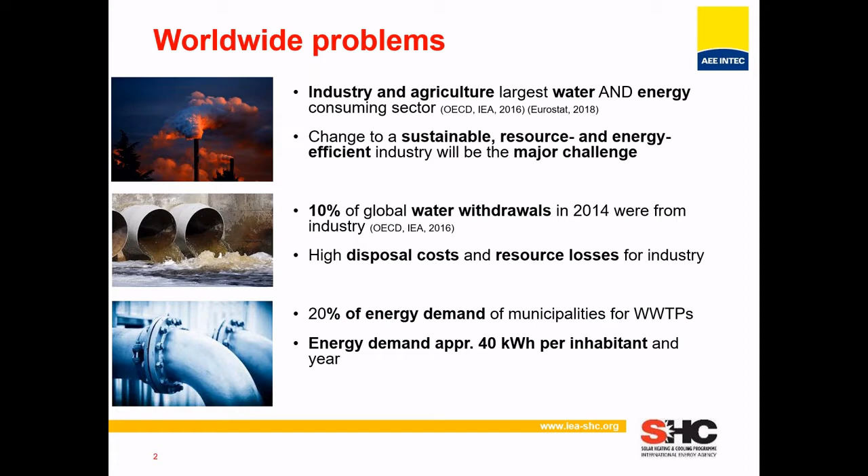What are now the main approaches, what we are dealing with within our network, within our Task 62? On the one hand, we see solar energy as a reliable source to reduce this fossil CO2 emissions in these different applications. We want also to create tools, a good ground to boost these markets on solar thermal industry, but also on water purification industry. And we have here two different approaches, two ways where we want to use the energy, the source sun, in general.

On the one hand, to use it on the solar thermal area, and to use this thermal energy to run different technologies - water purification technologies, water separation technologies, like membrane distillation, like evaporation, vacuum evaporation, etc. And on the other hand, we also want to use the solar photons to deal with or handle this wastewater in this way, applying technologies like photocatalytic water purification, decontamination, or disinfection systems. In my talk now, I'll focus on solar thermal technologies.

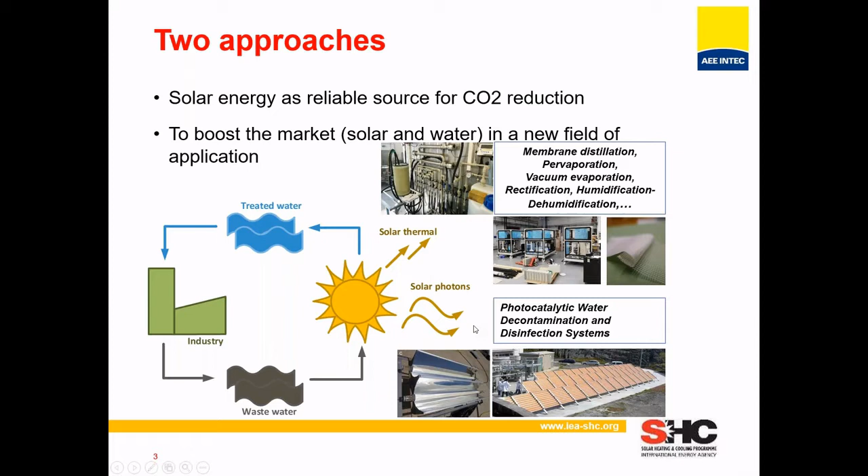What are the targeted results? As I said, the title of the talk is this Nexus energy water industry, and the targeted results are also allocated to three areas. So the energy area, or the solar area - we want to develop new solar collector concepts. We want to have a strong link to solar collector suppliers, developers, so they get new market ideas, and to identify potential markets for the technology itself.

On the water side, of course, water separation technologies, decontamination and disinfection technologies - to apply and see how these can be linked with solar applications, and of course to recycle valuable resources out of wastewater. And for the industry, we want to identify emerging technologies which are not state-of-the-art at the moment, but have a big potential in the future. We want to create energy and CO2 savings, of course. A guideline for the stakeholders will be developed, and we want to identify different integration concepts.

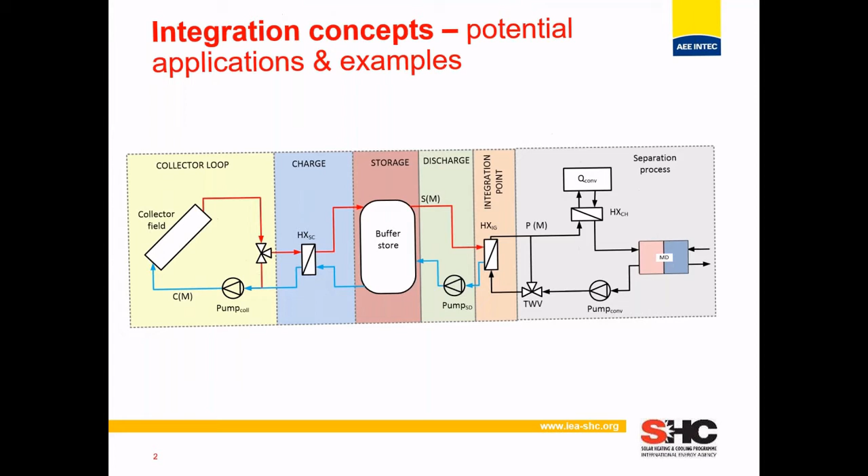Speaking about integration concepts, this is a very general structure of such a possibility, how to integrate or combine water separation technologies and solar thermal. On the one hand, you see here the solar thermal collector fields. Then we have a charge system, heat exchanger, a storage system, a discharge system, integration point, and then on the right side, the separation or purification technology, which gets its energy from the sun, from the solar collectors, but also additionally from other conventional energy sources.

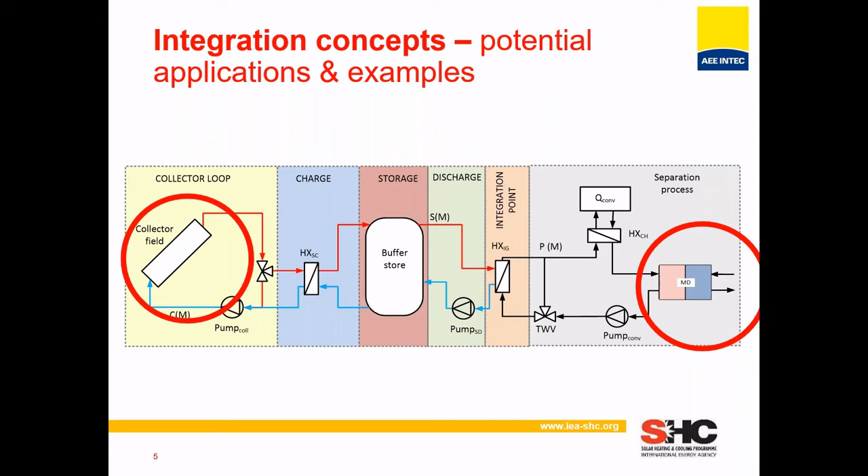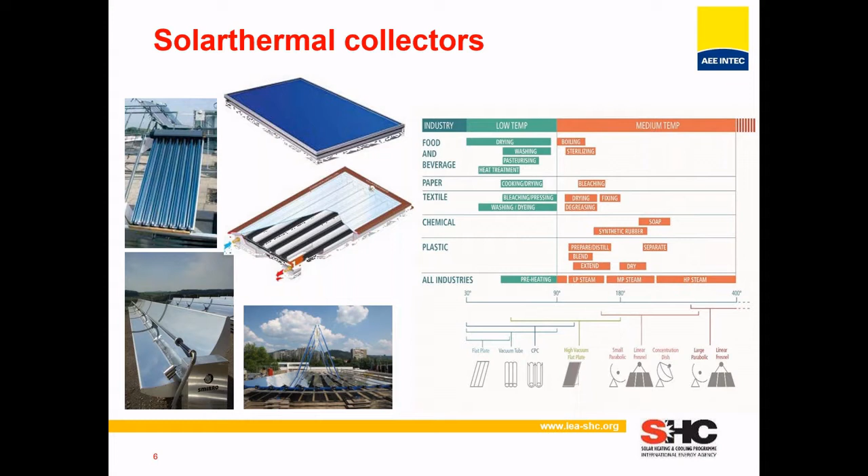But on the industry side, I think this is maybe not so well known. We identify different applications, different possibilities, different industry sectors where, at the first approach, we have the highest potential. Galvanic industry, to recover valuable metals and also to recover acids. We see here a big potential for this Nexus application.

Then textile industry, to treat wastewater, especially wastewater coming from the dyeing processes. The food industry, of course, to treat process streams like waste streams or milk streams, to concentrate these streams and to generate, for example, whey powder or milk powder, or also to concentrate juice, but also to recover volatile aroma compounds in different products.

The bio-based industry, as a biorefinery industry, a future industry sector, but we see here big potential for this combination of different separation technologies to recover ammonia, to use this as a fertilizer, but also maybe to use it as an energy vector. Additionally, to treat biogas sludge, and to recover ammonia, or to reduce other compounds in this sludge system.

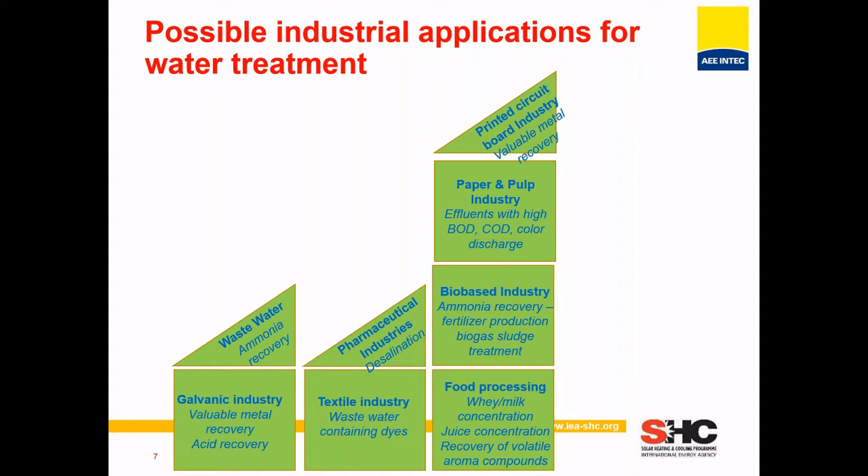Pulp and paper industry. We see here a big potential, especially in the different wastewaters, to decrease the BOD, COD as a combination of different compounds in the wastewater, or also to reduce the color in this discharge system. Wastewater in general, I will give you some examples later on, especially to recover ammonia as a very promising future energy vector, but also as a basis for fertilizers. And also pharmaceutical industry, especially in the desalination to recover salts coming out of this product, and the printed circuit board industry, to recover valuable metals like gold or palladium.

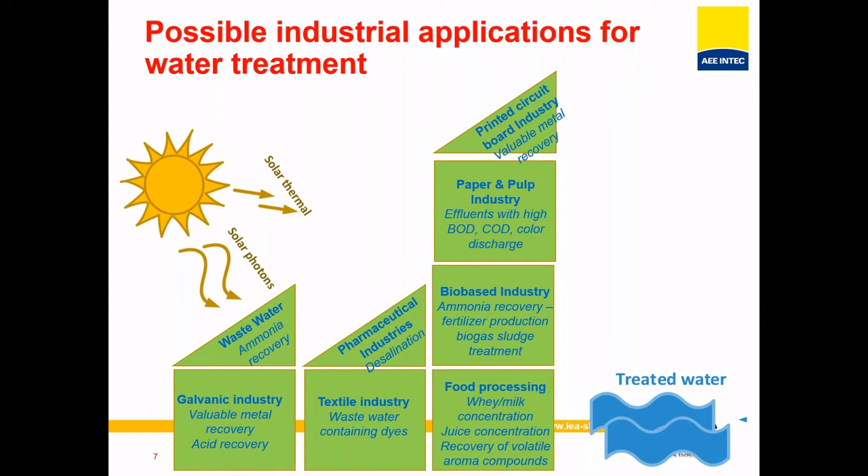These are the different applications where we see a huge potential, and I just want to give you a few brief examples. First example is for the galvanic industry. This is an example from an Austrian galvanic company, and the problem here is that this rinsing bath, or the preservation bath, is full of chemicals, and additional water always gets into this bath, so they have to add chemicals to keep the concentration in this bath.

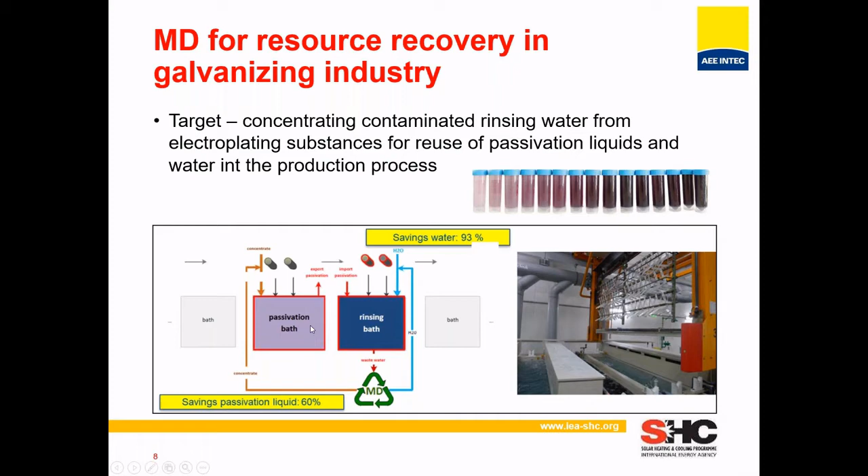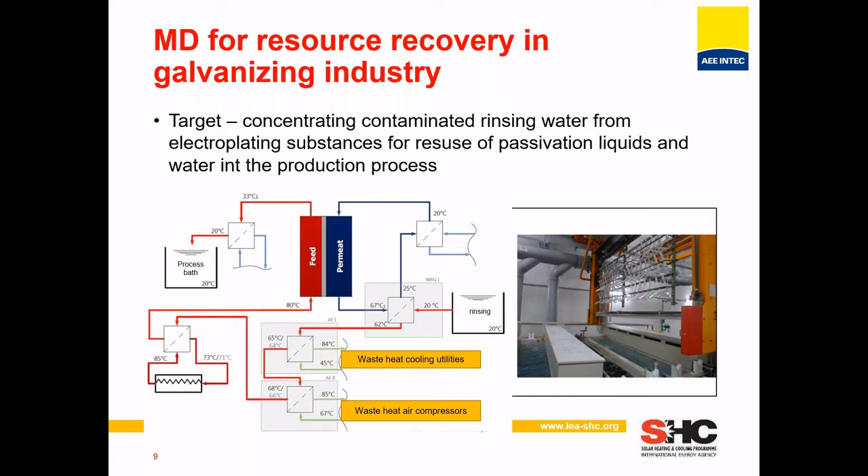We developed a concept, shown here, how to continuously recover these chemical baths, to separate water out of this bath, to generate water on the one side, and to keep the concentration in this bath on a constant level. The idea was then to run this separation technology, which is done by membrane distillation, on the one hand with waste heat, but also with solar applications. The results are impressive: about 60% chemical savings and more than 90% water savings could be reached in this case study.

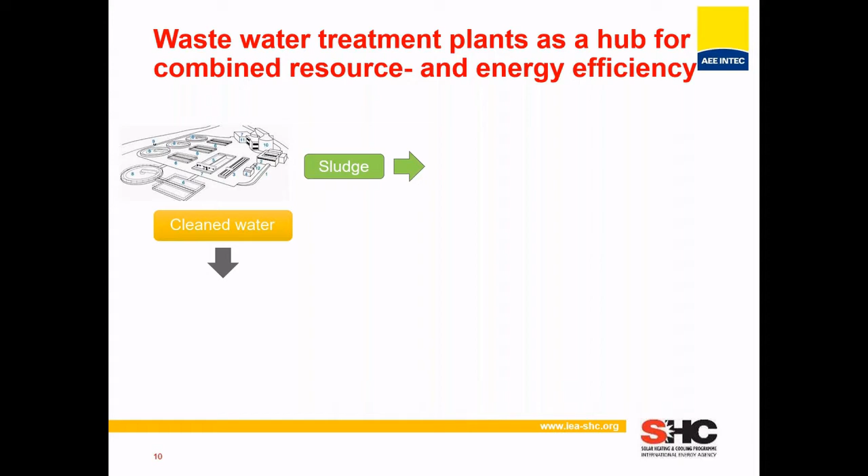The next example: as I told you already, wastewater treatment plants are a huge consumer, but also have this big potential to be one of these future energy distribution points for cities, for municipalities. How could such an integration of a wastewater treatment plant look, to develop a concept where the wastewater treatment plant is not a consumer anymore? Of course, clean water is the most important part, but we also have sludge going out of the wastewater treatment plant.

Now, the clean water going out of the wastewater treatment plant has a certain temperature left, and in combination with a heat pump and this heat exchanger, a huge potential of energy recovery is possible. The sludge is in most cases already treated in a biogas plant, in a digester tower. Here we have the biogas, but this is not used very often, and we have the residues out of this biogas plant. What can we do with the biogas? It can be treated in a CHP plant, a combined heat and power plant. It can go directly into a gas network.

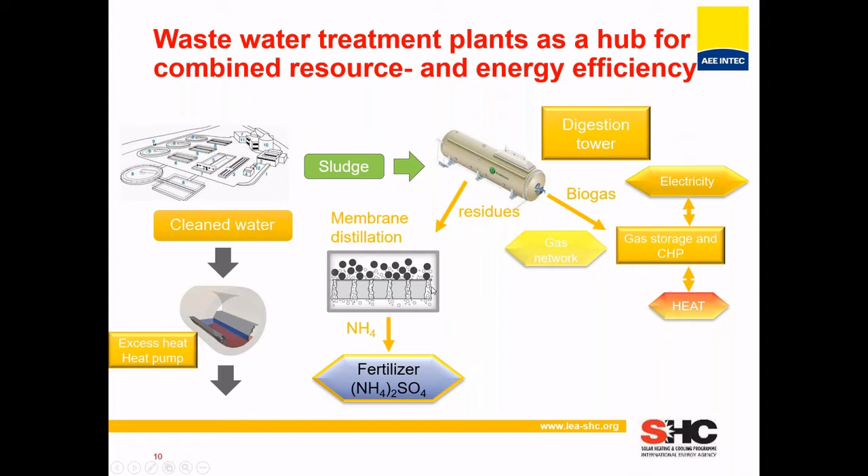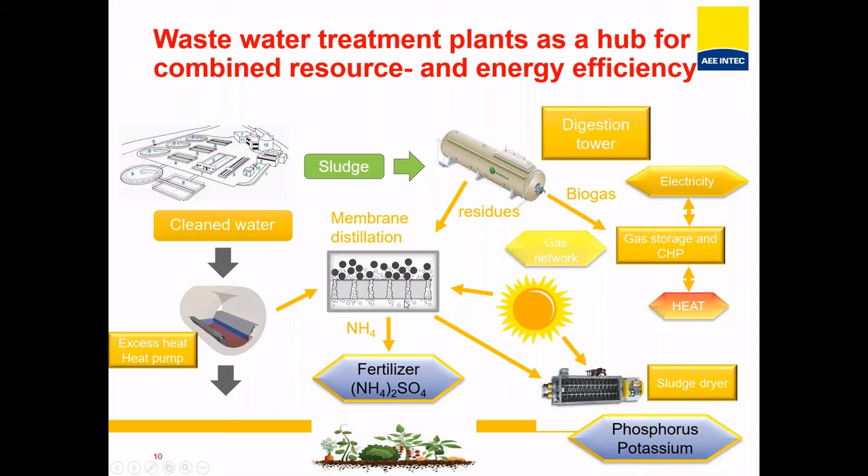And the residues can be treated, as I told you already, for example, with a membrane distillation facility technology to create ammonia, and use this as a fertilizer. The sludge can be dried, and potassium and phosphorus can be recovered in this form. And you can see here, solar applications can be applied in the membrane distillation facility, but also as a solar dryer.

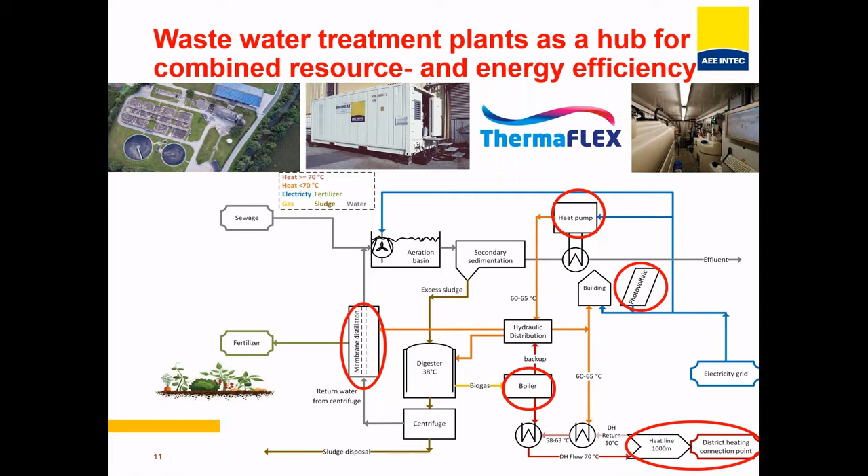It is not only theoretical. We are working here on a pilot plant at the wastewater treatment plant, where, as you can see here, this concept is created with different applications similar to what I showed you before. Here's the heat pump, photovoltaic, membrane distillation, the boiler, and using also the heat for the district heating part.

What is important? What can you reach with such a concept? You can reach up to 20% electrical savings. The yield of biogas can be increased up to 30%, and additionally quite a substantial amount of fertilizer can be produced by separating the ammonia from the sludge. And this combination with a solar thermal sludge dryer, heat pump, CHP, and additionally the ammonia can maybe be converted into energy in a fuel cell.

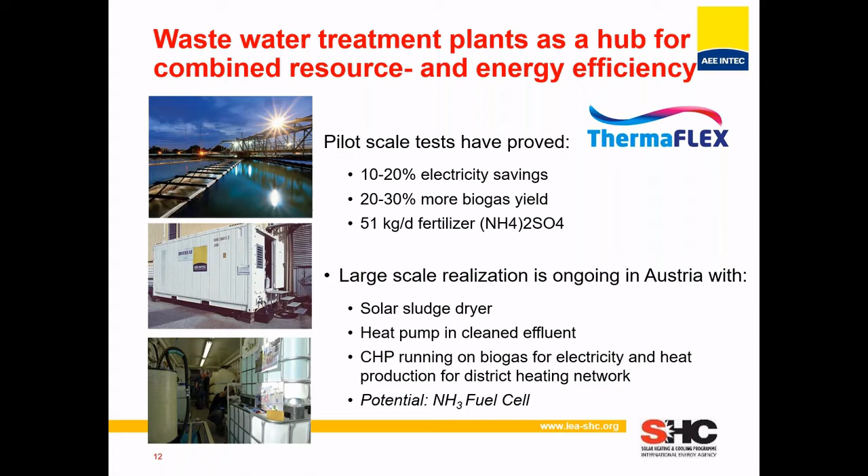So, different possibilities. This pilot plant is at the moment in erection and will be implemented in an Austrian wastewater treatment plant.

Coming also to a wastewater treatment plant with some additional applications. This is the project Greenlysis, which combines separation water technologies to create hydrogen and oxygen out of the wastewater. It's from a European project, but led by a Spanish company and the University of Barcelona.

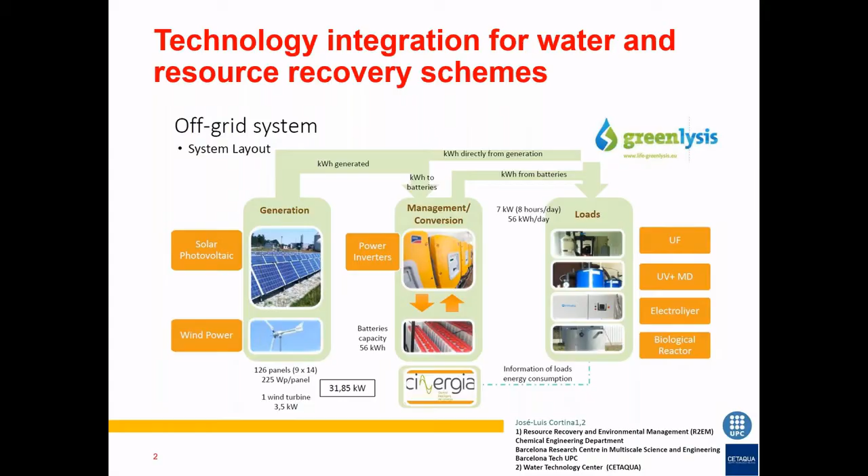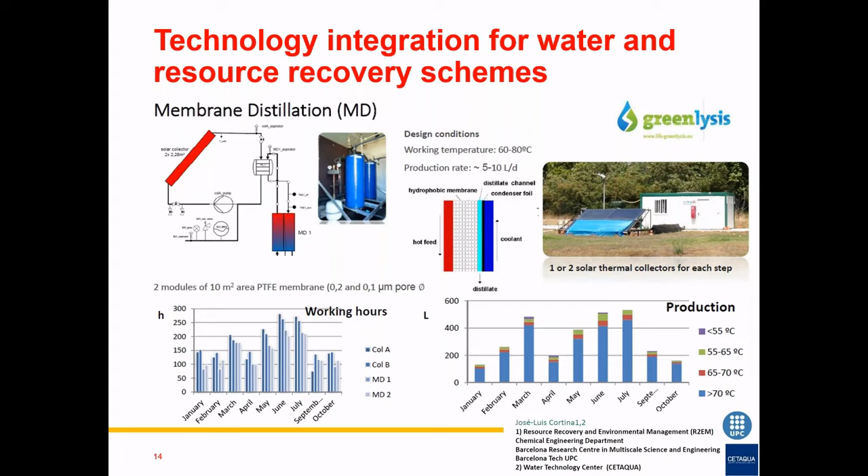And with this combination of wastewater pre-treatment, wastewater purification, with electrolyzers which are implemented, with solar photovoltaics, wind energy, but also solar thermal, which is together with a membrane distillation facility that also treats the effluent water out of the wastewater treatment plant, hydrogen and oxygen should be produced, with the potential to integrate this hydrogen into, for example, a methane network.

Another quite interesting technology or product is a solar panel or solar collector, where you find a combination of the purification of water directly with a membrane distillation facility. So you can see here, dirty water is going directly into this collector. The sun is heating up this wastewater, and with the membrane distillation, pure, cleaned water is separated, and we have a higher concentrated wastewater on one hand, and on the other hand, clean water.

Drinking water. The idea here with this product, which is from SolarDew, is to produce drinking water in areas like developing countries and emergency areas, but also for military applications.

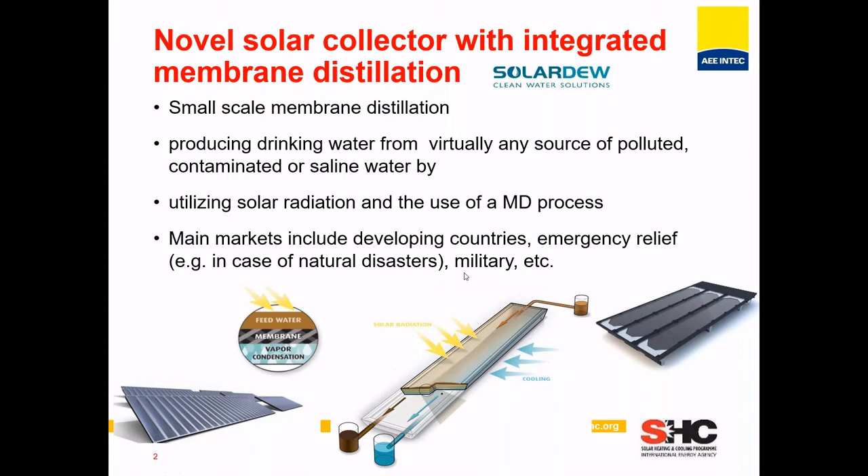And my last example that I wanted to show you is a combination of solar concentrating systems, Fresnel collectors from the company Rioglass, and they are supplying the energy coming from these concentrating systems to a vacuum multi-stage evaporator, which is a pilot plant running in Spain for wastewater from copper mining applications, as you can see here below.

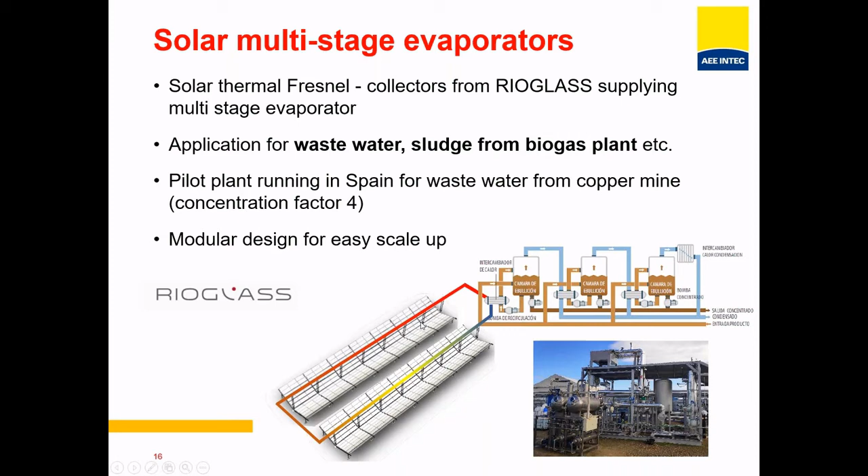And it is interesting especially because here too, similar to SolarDew, it is on a modular design basis, so it is easy to scale up such systems, on the one hand on the solar side, but also on the evaporation side.

Coming to my last slide, what are up to now the most important findings? The nexus of energy, water, and industry is very important. I think I showed you the numbers in the beginning. I think it's obvious. It's a very important future topic and a future strategy to reduce CO2 emissions.

Wastewater treatment plants are promising energy and resource sources. So it's no longer the case that they are just consuming energy. They can produce energy and they can also produce valuable resources like ammonia or potassium. Membrane separation technologies for recovering nutrients and products out of wastewater could be identified and will be under future research, to really select the right technology for the right applications.

New solar thermal collector concepts will be needed, but some of them are already on the market, like I showed you with SolarDew. Then also, of course, decision-making guidelines, tools, etc., will be important in the future to disseminate these activities and to reach further industries and further applications.

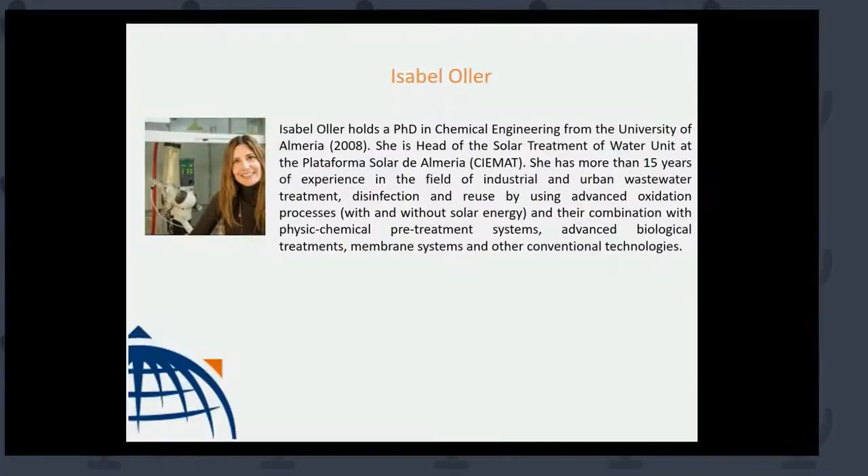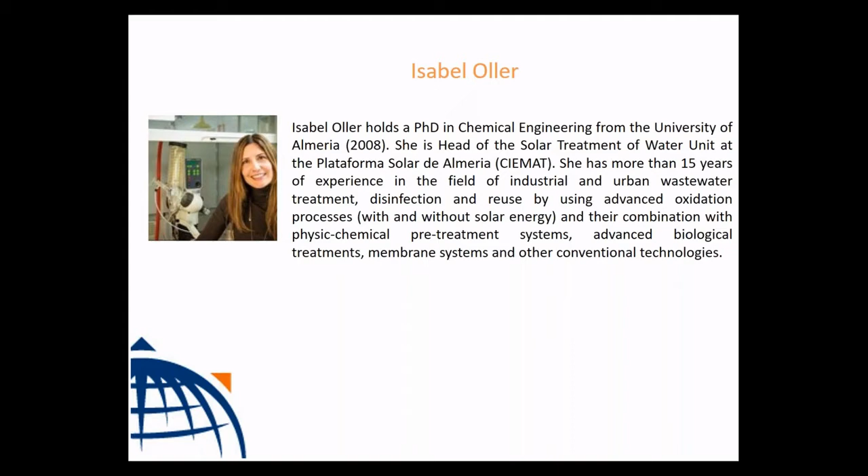And I will now welcome Isabel Oller, our second speaker. She is head of the Solar Treatment of Water Unit at the Plataforma Solar de Almería in Spain. She has more than 15 years of experience in the field of industrial and urban wastewater treatment, either like advanced oxidation processes or combining them with physicochemical treatment or membrane systems. And she holds a PhD in chemical engineering. Her topic today is Towards Industrial Water Footprint Reduction via Solar Decontamination and Disinfection Advanced Processes. So Isabel, the floor is yours.

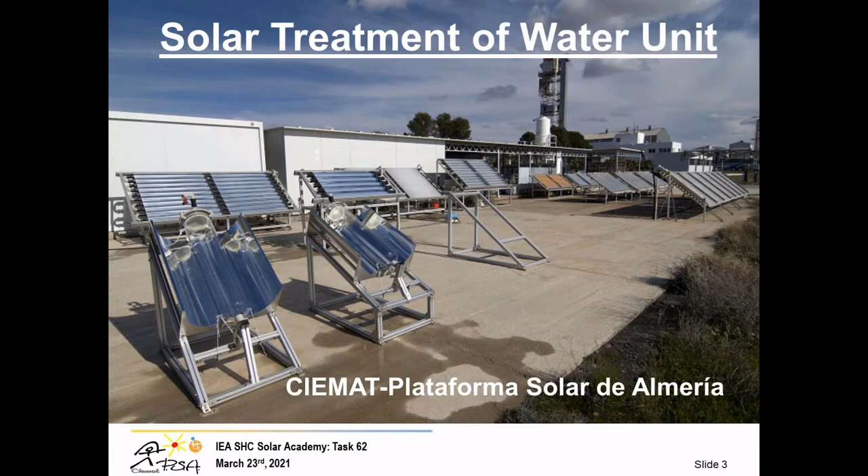We are located in the southeast of Spain, in the desert of Tabernas, around 100 hectares. And this is only a picture of one of our facilities in the solar treatment of water research unit. I'm the head of this unit now, and these are some of the lines that I would like to share with you that we are focused on in research and development. As you can imagine, like the rest of the PSA, we are focused on being in the middle between lab scale experiments and demo site experiments and going to market technology.

We try to focus on solar photocatalytic and photochemical processes as tertiary treatment for removal of pathogens and pollutants in urban wastewater. But we have also a strong research line focused on the integration of advanced oxidation processes and other conventional or advanced technologies such as membranes, ozonation, for hazardous pollutants and pathogens removal from industrial wastewater, but trying to be always focused on reducing operating costs and, of course, improving the water treatment efficiency.

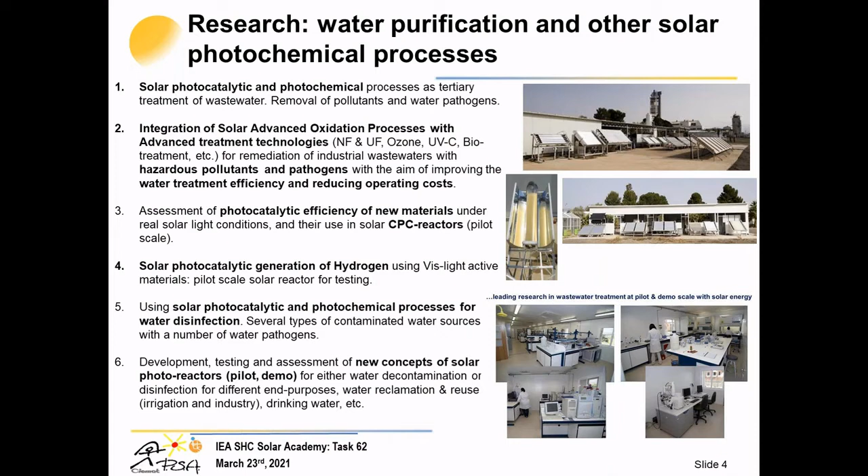We are also focused a lot on trying to develop, design, and test new concepts of solar photoreactors at pilot or demo scale, for water decontamination and disinfection and mainly for reuse purposes. As you may know, we are living in the southeast of Spain, so we have a lot of water scarcity problems.

So as all of you know, the water energy nexus is quite an important issue nowadays. Of course, we use water for energy production. This is something that not all people know, but we also need energy for water. We need water for producing electricity, even for some of the renewable energy sources.

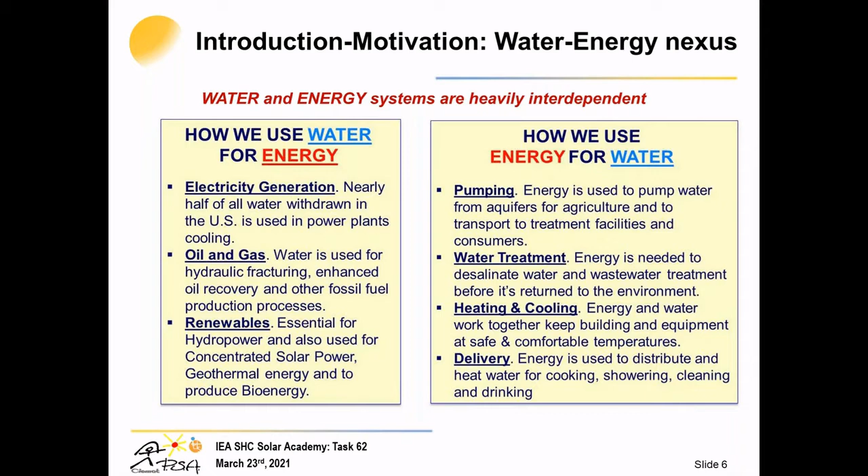But we need energy not only for pumping water, heating and cooling systems, and delivering water to the municipalities; water treatment also requires energy. Indeed, we must know that the binomy water–energy is always present. So problems on one side are always problems on the other side, but there is an important

and clear coincidence between the existence of water problems, normally in arid and semi-arid zones in the world, and the availability of abundant solar radiation that allows us to try to apply water treatment technologies based on solar energy in those zones. Of course, in these semi-arid or arid zones water scarcity is mainly the focus, but we also have problems of water quality, though not quantity, in the north of Europe.

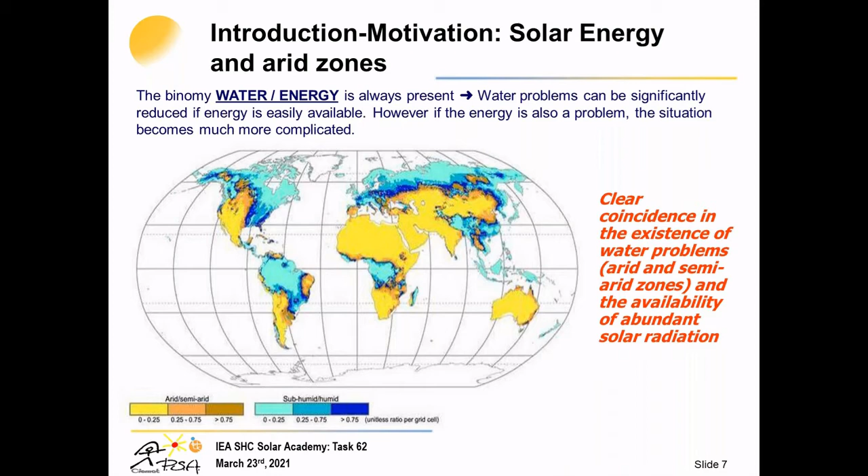So the water technologies that I'm going to introduce are also valid for improving the quality of water in northern Europe, for instance. But it is not only an issue of the water-energy nexus, it is also an issue of the water-energy-food nexus. Here I would like to leave you a few words on how the water-energy nexus also affects food. These three sectors are intimately related, and we always try to connect all of them.

For instance, this is known by everybody, but according to the FAO, agriculture is the biggest consumer of fresh water worldwide, followed by industry. We also consume a lot of water, as I said before, in energy production. And regarding food, nowadays almost 800 million people suffer malnutrition in the world, and it is expected to increase even more because the world population is increasing exponentially, as all of us know.

It is also interesting to know that we don't need water only for drinking and for ourselves, but also for producing food. For example, we need 3,000 to 5,000 liters of water to produce 1 kilogram of rice. So it's quite important to always consider the link between these three issues.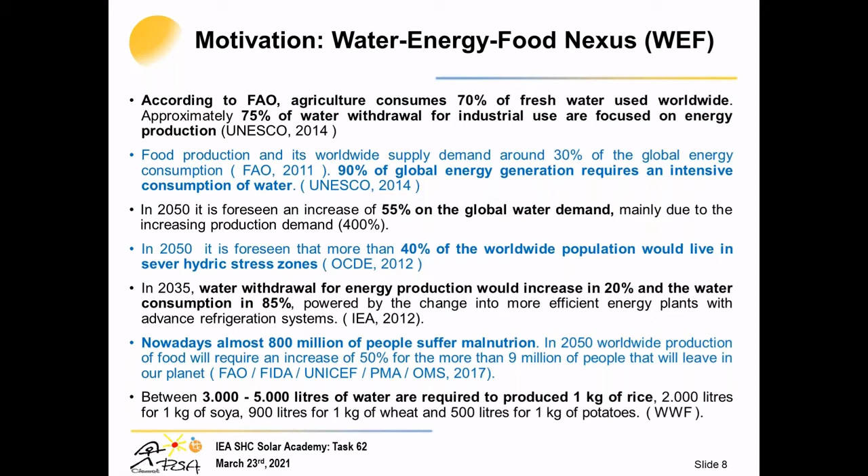Regarding industrial wastewater, which is one of the main contributors to contamination, we all know that the specific non-biodegradable or recalcitrant contaminants found in industrial wastewater cannot normally be treated by the conventional wastewater treatment plants in urban sites. This causes accumulation of persistent contaminants and even problems in the normal operation of these plants. The low efficiency is due to the toxic or biorecalcitrant nature of the compounds.

So it is important to control the process, but also to find alternative treatments. Normally, it is necessary to combine and integrate different oxidation processes to improve the biodegradability of the industrial wastewater, and to combine them with biological systems, which are always the cheapest.

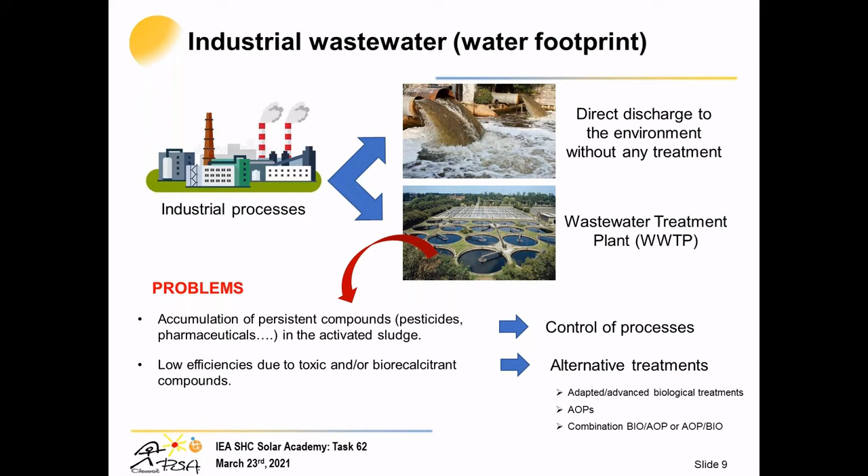And finally, combining both, always focusing on life cycle assessment and health risk assessment, depending on the final use we want for this industrial wastewater once treated, because it can always be treated, even to high quality, to be used or reused not only in the industrial process itself, but for other purposes in the city, or for irrigation, for instance.

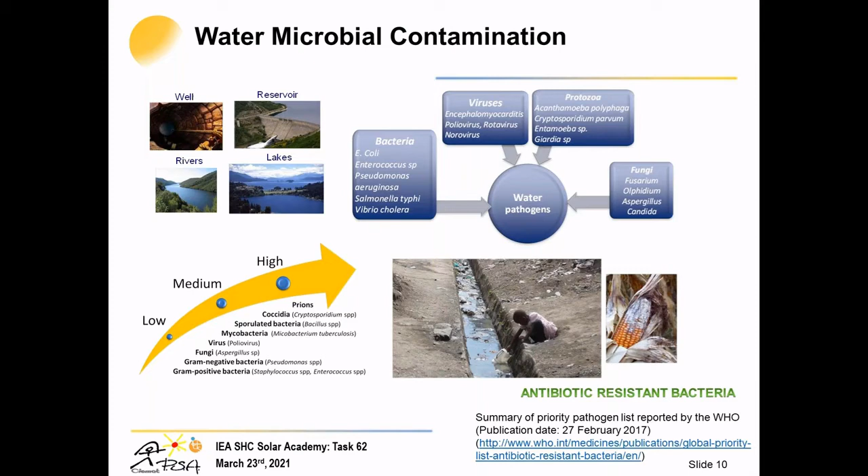Another problem we have is microbial contamination, because in water, and in industrial wastewater, we can find pathogens: bacteria, viruses, protozoa, and recently we are facing the problem of antibiotic-resistant bacteria and genes. In this sense, following the line of Christoph's talk, what we propose are advanced oxidation processes that can take advantage of solar energy.

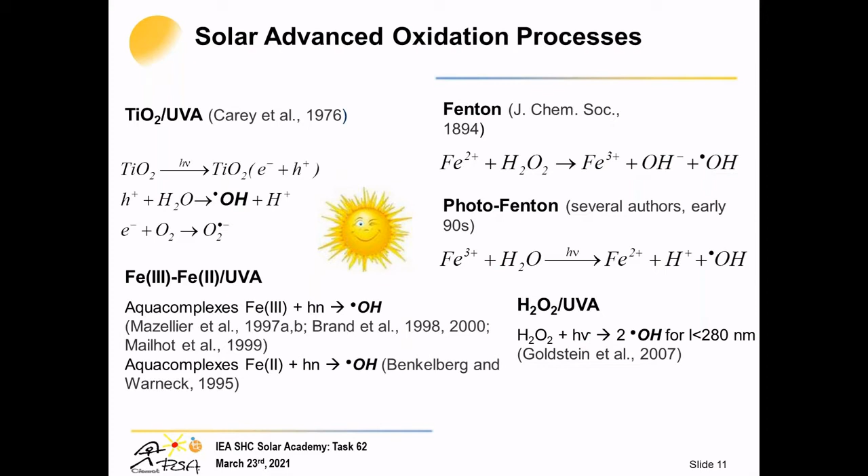So we must take into account that. So of course, it's always even more difficult trying to combine the thermal and the photon side of solar energy to take profit for industrial wastewater treatment.

In this slide, I would like only to introduce you the systems that we have at PSA and that we normally investigate at pilot scale for giving solutions to specific industrial wastewaters. Here we have two lines, one coming from the clean or urban wastewater effluents, but I'm going to focus on the non-biodegradable, toxic or partially biodegradable complex wastewaters, that are industrial wastewaters, which normally require a physical-chemical pretreatment, which is normally used in all the industries.

But the thing is, after this physical-chemical pretreatment, we must be clear on how biodegradable and how toxic our industrial wastewater is. Because if it is toxic or non-biodegradable, we cannot go directly to an advanced biological treatment or biological treatment. So we must try to improve the biodegradability of the wastewater by an oxidation process.

It could be a photo-Fenton process, according to the previous slide, which is based on iron and hydrogen peroxide for the production in a homogeneous phase of hydroxyl radicals. We can go through ozonation or UV pilot plants, which are more commercially available in the market, or we can go to the electro-photo-Fenton or electro-oxidation systems.

But it's only going through these oxidation systems just to improve the biodegradability enough for going to an advanced biological treatment or to a biological treatment. In this case, we normally use immobilized biomass reactors, could be also MBRs or even conventional activated sludge systems. But the idea is trying to combine the systems for reducing operation costs.

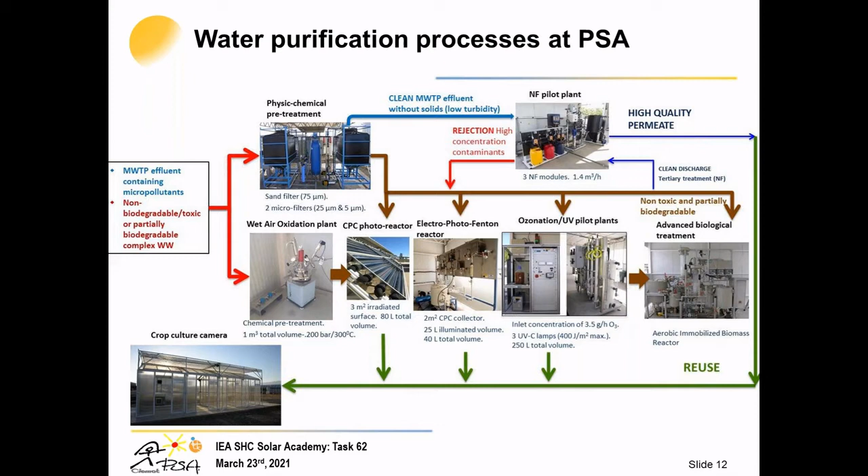For instance, I will show you some example afterwards, but we have available at PSA a crop culture chamber in which we try to evaluate the effect of irrigating crops with treated wastewater, to check what is the effect on the fruits and the soil when we do, for instance, the irrigation of lettuce or tomatoes.

So just to present you a little bit about the solar photoreactors for this kind of application, some parameters that we must take into account for the design. They must have an efficient distribution of the UV radiation, as we are using the UV, not the thermal part of the solar energy, as I said. They must have pH resistance and chemical stability because, if we are dealing with industrial wastewater, normally it could have an acid or basic pH, so we must be careful with the materials that we use.

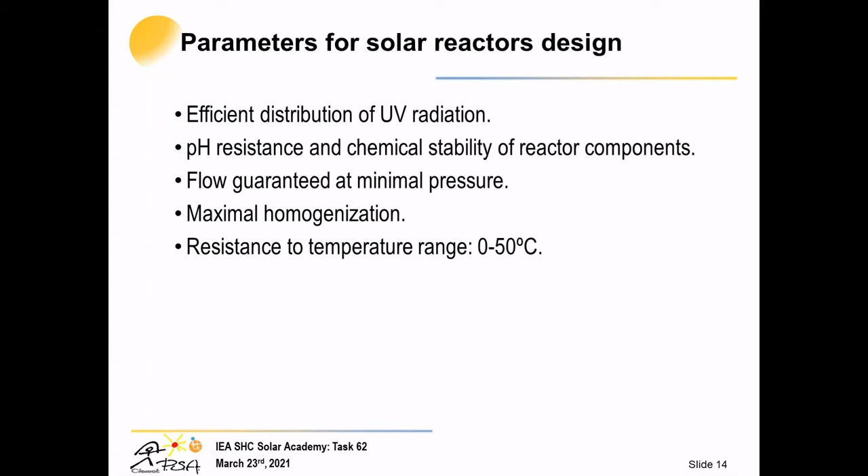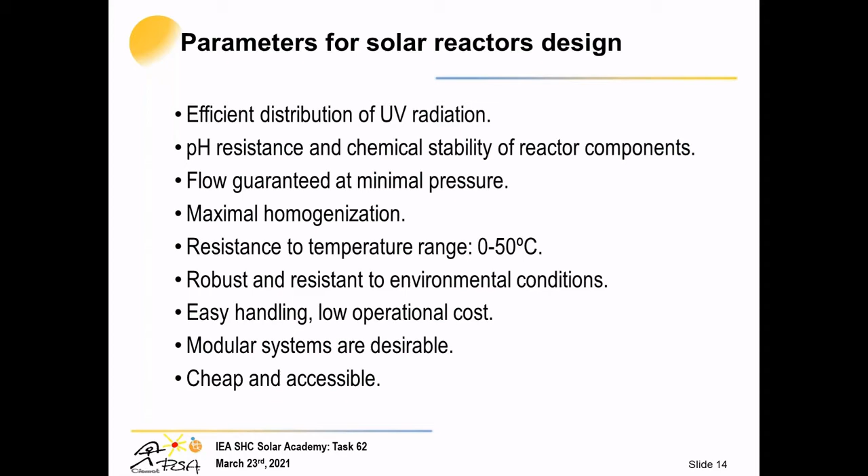The flow must be warranted because we need maximal homogenization, normally turbulent regime. It must be resistant because, though we are not concentrating the radiation, if you are in summer you can attain temperatures higher than 50 degrees. They must be robust and resistant, of course, to the environmental conditions. They always need to be easy to handle with low operational costs. Modular systems are always desirable and, of course, as cheap as possible and accessible.

So I'm going to present you the compound parabolic collectors, which are the most studied photoreactors designed for advanced oxidation process applications. These are static collectors with a surface following an involute around a cylindrical reactor tube. So this is the cylindrical reactor tube. We have the double involute here. So the light is reflected by the CPC and is distributed all around the tubular receiver, so that almost the entire circumference is always receiving the radiation whatever the time of day, as you can see in the pictures.

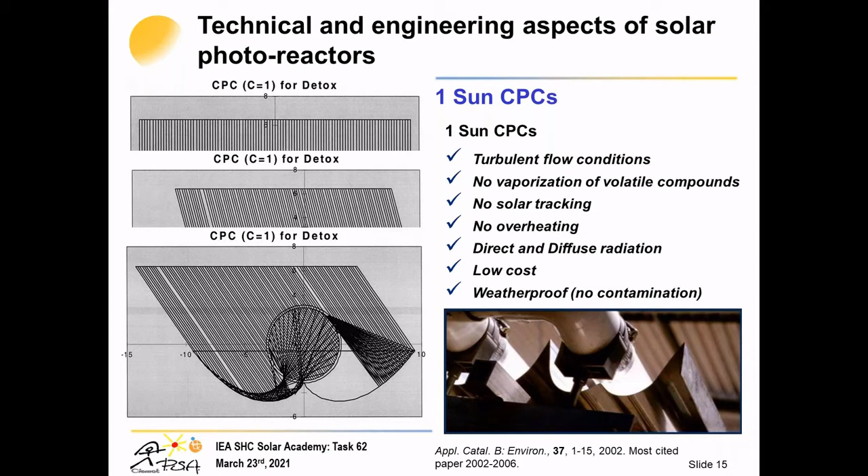So the CPC has a concentration factor of 1, so it is not a concentrated system, and can make a highly efficient use of both direct and diffuse radiation. This is one advantage for us, as when we have a cloudy day, we can also take advantage of the diffuse radiation, and we can perform our experiments and treat wastewater. Of course, they also have a high optical efficiency and a high quantum efficiency, which is quite interesting also.

So just to show you, because this kind of photoreactor has also been erected in demo sites, and indeed Christoph showed you in his presentation a picture of one of them.

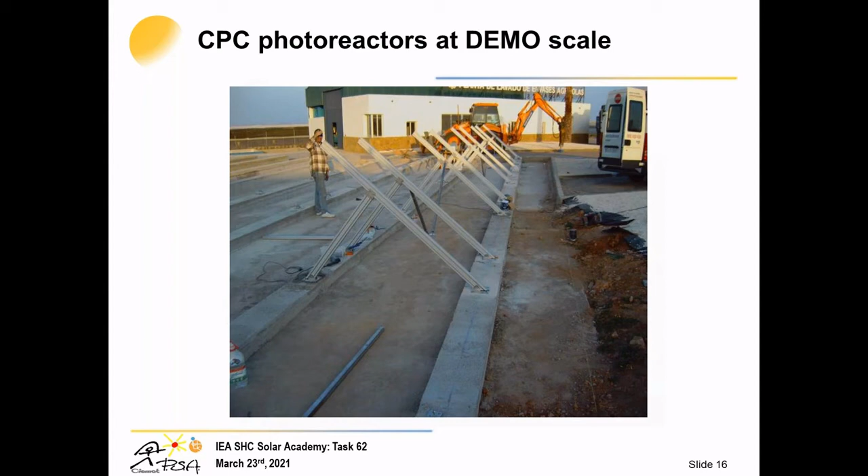Here I show you several pictures on how the company constructed these CPCs. I will show you a few more details, but another important thing I want to stress in this slide is the row separation. We must take into account that we are facing south, and according to our latitude, depending on where we are, we must take into account the shadow that can fall on the other module of the CPC. So this is a kind of engineering side.

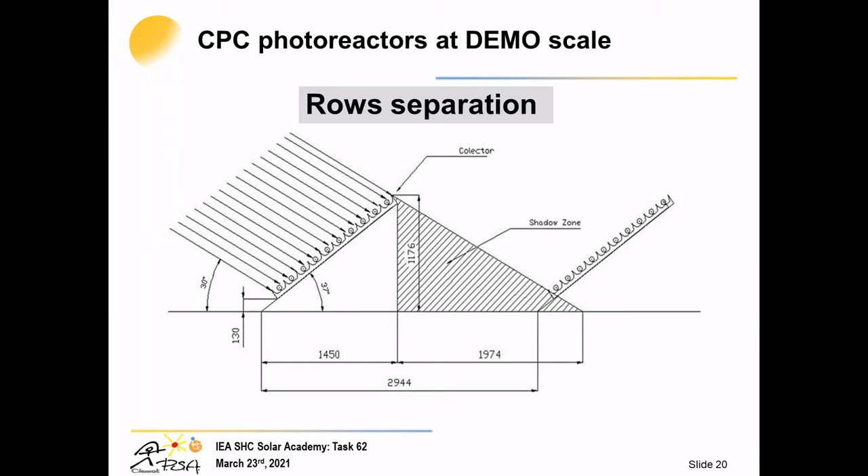So this is the final picture of the pilot of the demo site that I've been showing in the previous slides. It's around 150 square meters of CPC modules. This has been installed in a company in which we wanted to treat the wastewater coming from the rinse of the pesticide sprayers used for the crops, the pesticides in the crops here in Almeria.

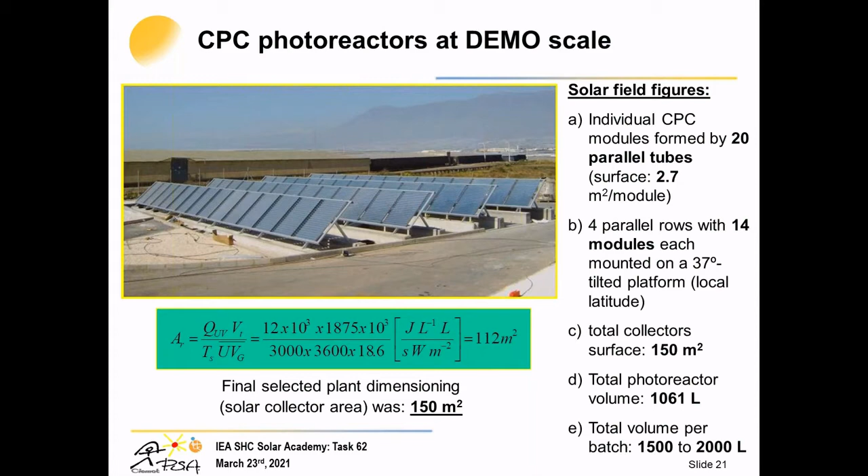And here, well, we have how we calculate the area. We are always focusing on trying to determine the minimum UV radiation that we require for treating the amount of wastewater. With that, we try to design the surface that we need for the compound parabolic collector modules. So we already have demo scale systems on this.

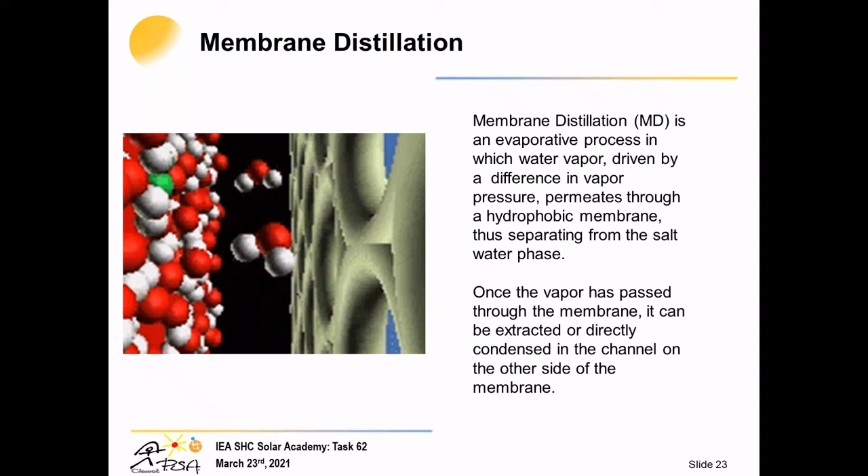I'm not going deeper on this because the nutrient recovery has been explained by Christoph. You know that in the case of membrane distillation, we are always speaking about taking advantage of the thermal energy coming from the solar radiation. But we can recover the ammonia. We have been testing this at lab scale and at pilot scale. These are the recovery of ammonia from an urban wastewater treatment plant. Of course, it's always more interesting to try to recover ammonia from industrial wastewater, because a characteristic of industrial wastewater is the clear difference between nitrogen content and organic carbon content. So it's always even more interesting to recover the ammonia. But I must say that, as far as I know, good recovery of ammonia is obtained at lab scale, though at pilot scale it's still under development, and also at demo scale, as Christoph showed us in several European projects.

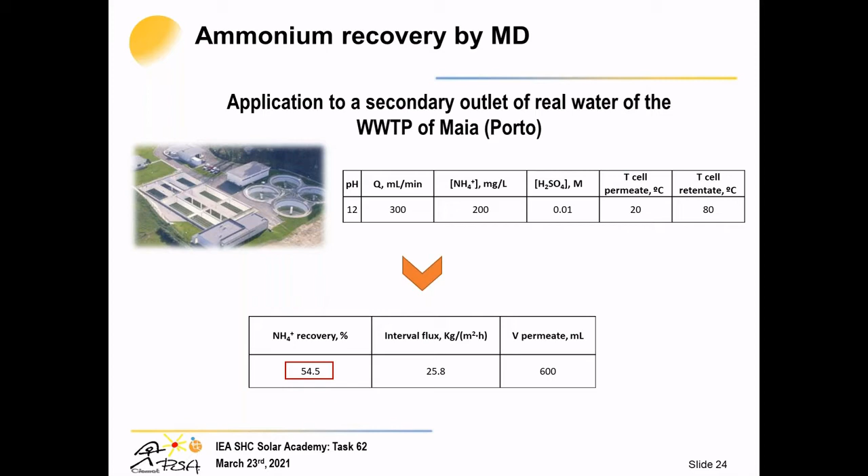So just using a few minutes to show you some examples. This is a typical industrial wastewater, let's say from our side, landfill leachate. Of course, we can have different landfill leachates depending on the landfill site. It could be urban, but it could also be industrial, coming from the industry. So we always try to give a treatment line in which we combine the physicochemical pretreatment, as I told you before. In this case, we did a conventional physicochemical pretreatment.

We attained a good reduction in color, which is necessary if we are going to apply a solar treatment afterwards. We did an initial dosage of iron-3 that favored the coagulation, but it was also quite favorable because we had a remaining amount of 56 milligrams per liter of iron that allowed us to perform photo-Fenton processes without an extra addition of iron. So we used what we initially required for the coagulation and flocculation system.

So finally, we tried to improve the biodegradability and reduce the toxicity, because we attained a reduction of toxicity from something like 85% to 14%, and we improved the biodegradability. This is just an indicator: as soon as it is higher than 0.3, the wastewater is highly biodegradable. So finally, we combined the physicochemical pretreatment with a solar photocatalytic process, the photo-Fenton process, with a biological treatment.

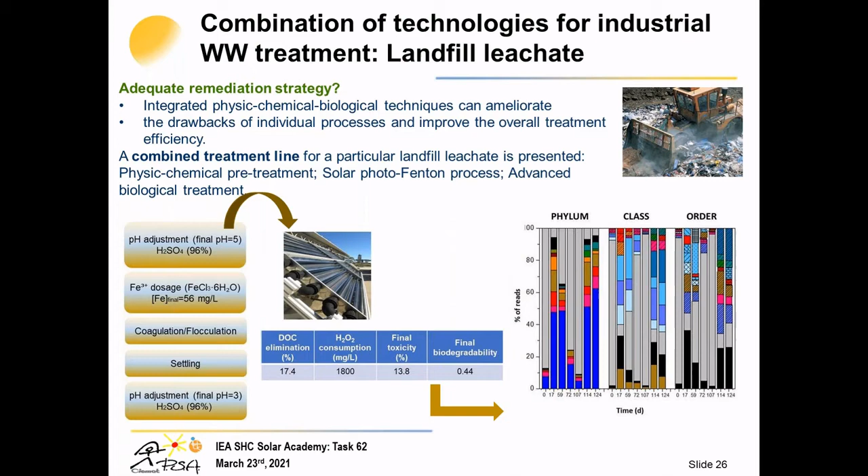And these are the main microorganisms that were increasing in this adapted biological treatment. So it's quite interesting.

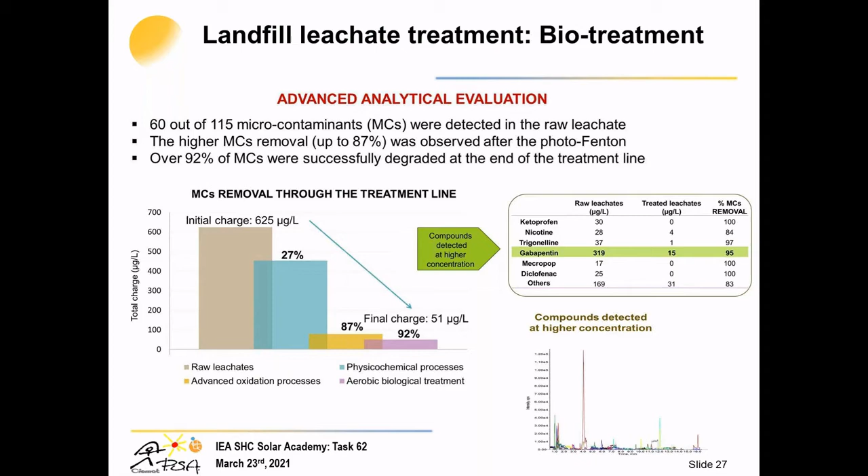In this, we can also apply advanced analytical tools to check which were the initial contaminants in the raw wastewater. And if we combine liquid chromatography with mass spectrometry, we can identify unknown microcontaminants, and evaluate how we eliminate them in the different steps of the treatment system.

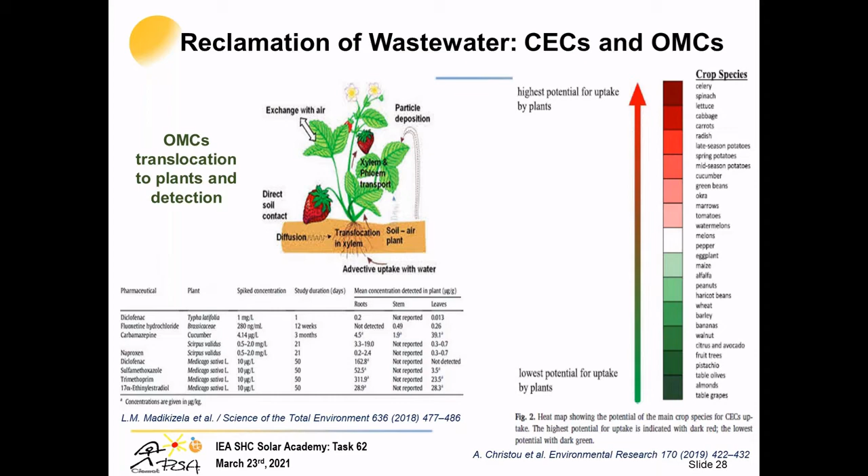Can you come to an end, please? Thank you, yes, it's only 2 slides more, to let you know the importance of the presence of microcontaminants in the effluent when we want to irrigate crops. Here I want to leave you a few reports on that, showing the potential.

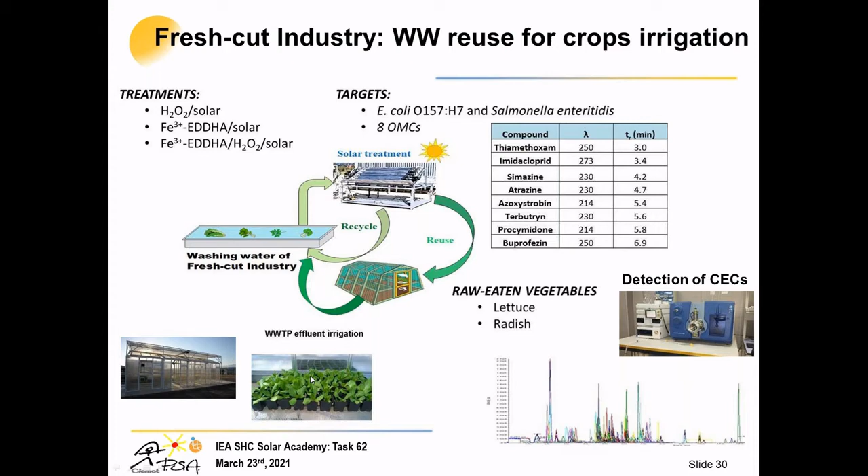It's only to show you how we treat with this system: solar energy with hydrogen peroxide and also iron for the production of hydroxyl radicals. Then we can reuse the wastewater, even disinfecting and eliminating the salmonella and the E. coli, reducing risk in vegetable crop irrigation and eliminating the presence of these contaminants so we can irrigate without problems.

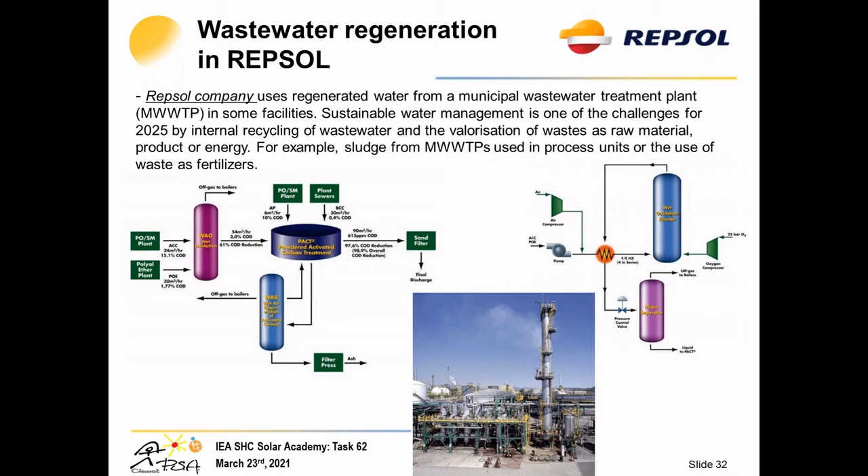This is the example of Repsol, to let you know that there are some industrial companies that have their own wastewater treatments. We have a deliverable in task 62 where you can review examples of industrial companies investigating their own wastewater treatment plants.

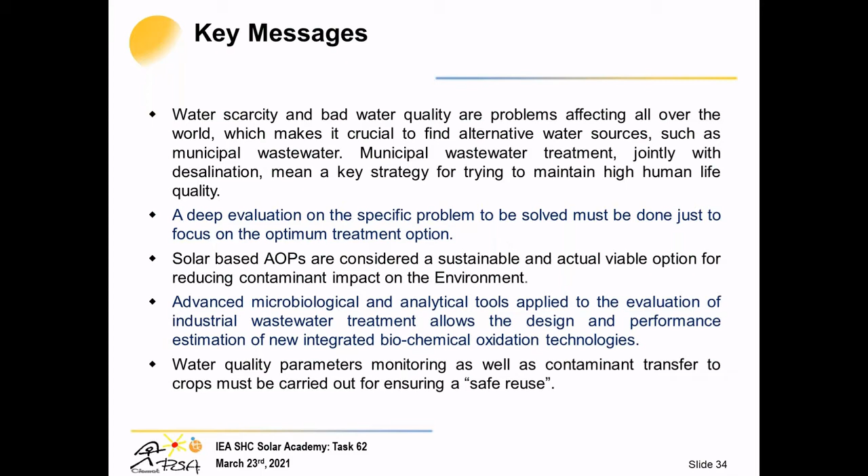Finally, some key messages I want to leave you about how efficient the solar advanced oxidation processes can be for all kinds of industrial wastewaters. But of course, we must always be careful to ensure safe reuse of the wastewater, depending on the final purposes, and always apply a life cycle assessment and a health cycle assessment to decide the best treatment technology.

This is our unit, and thank you very much for your attention. I'm open to your questions at the end. Thank you.

It was really interesting. So in my presentation, I would like to show you a bit of the newHeat company and the projects we develop first, and then I will end my presentation with the R&D project Remini Water, that addresses solar powered water reuse and resource recovery in the mining industry.

Okay, sorry, I can't move my screen. Okay, so newHeat is an integrated renewable and recovered heat producer. Our solution is to combine different technologies to maximize the renewable heat share and minimize fuel consumption. So as you can see with those three pictures, we want to combine waste heat recovery, solar thermal, and daily and seasonal heat storage to address the needs of our potential clients.

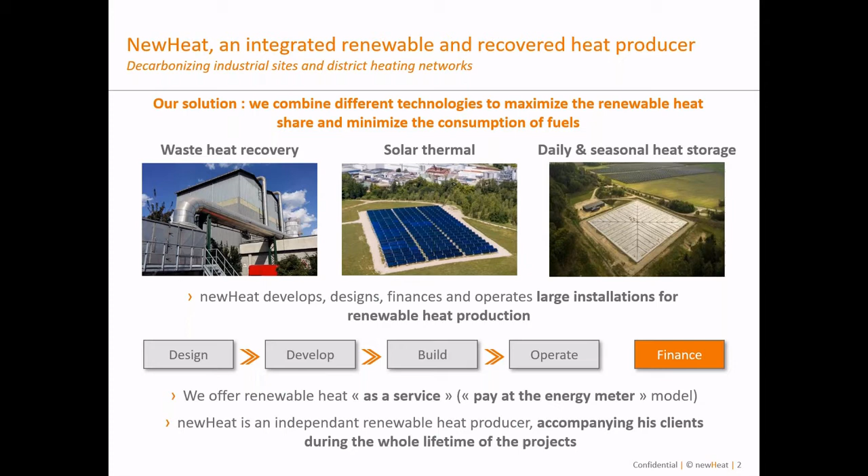And once we have finished the design, we can go follow with the manufacturing phase and also the operation, because newHeat, as I said before, the whole lifetime of the project means first to manufacture the solar plant, and also to operate it, because newHeat will invest in the plant. So we are the owner, and the client doesn't have to invest in anything before we sell the heat.

So then I will present a bit of our technical know-how. Our know-how is to design tailor-made solutions to ensure competitive heat price with a secured and metered energy delivery. So we first define the most robust, efficient integration to industrial processes or heat networks, and then we select the most appropriate technologies and optimize the sizing of the production units.

The technologies are mostly, for newHeat, flat plate collectors. We use direct and diffuse irradiation to heat water. For the flat plate collectors, we can either use fixed collectors or tracking systems, so to follow the sun throughout the day.

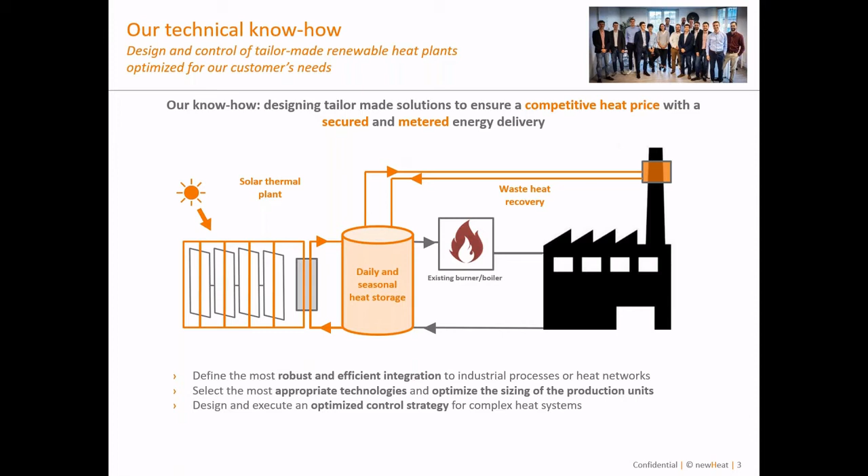And finally, we design and execute an optimized control strategy for complex heat systems, in order to really supply heat to the demand according to the sun resources, and also to the demand of the client, which can change throughout the day and throughout the year. The problems of overproduction can be dealt with through heat storage.

And also, as we use solar thermal solutions and other renewable heat production systems, the idea is to decrease their CO2 emissions. We just decrease the CO2 emissions, but we don't entirely suppress it, because as we use solar energy, we are really dependent on the day and on the solar resource. So in general, the current boiler is conserved as backup when needed, but its fuel consumption is deeply reduced.

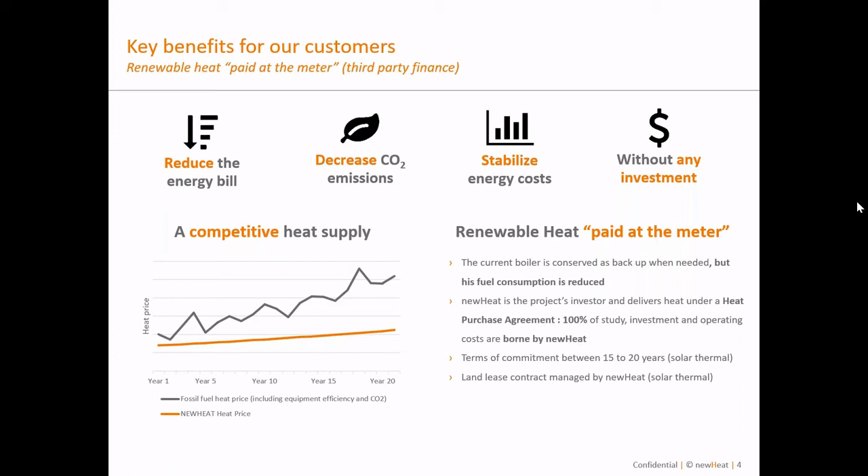And then just to present some recent news, we achieved a really important step for the newHeat company that demonstrates the competitiveness and robustness of newHeat's approach and projects. We closed a bank fundraising for 5 solar thermal and recovered heat assets for 28 thermal megawatts, and 15 million euros of total investment.

This fundraising is thanks to two specific types of investors. First, it was some banks who financed this fundraising, so Triodos Bank and Crédit Coopératif, but also some regional funds, so 3 regional funds from France, for 2 million euros total budget.

So this means a lot for newHeat because it really emphasizes that our business model and the work we do is recognized and is worthwhile, because as a company, we really want to not just propose new technologies to the clients or new solutions in renewable heat, but also to be competitive against fossil fuel consumption. So it's really meaningful for us.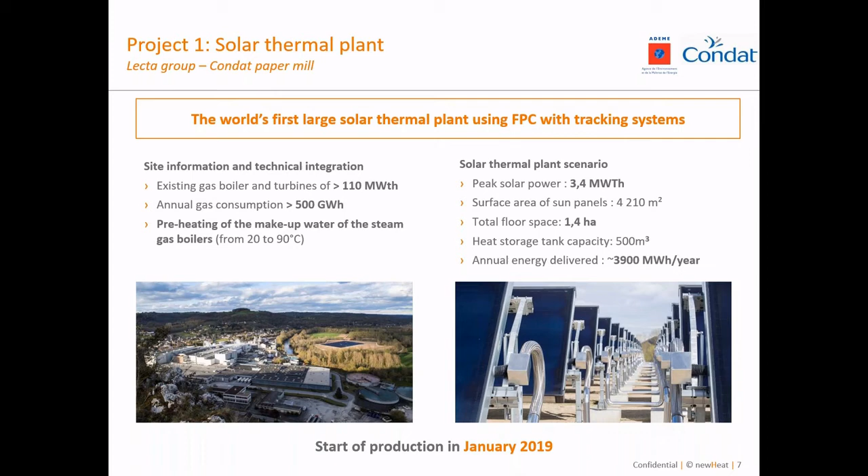The idea of the solution from NewHeat is to heat the makeup water of the steam gas boilers from 20 to 90 degrees, depending also on the season; in winter, 90 degrees can sometimes be reached. The solar thermal plant is 4,200 square meters with a storage capacity of 500 cubic meters. Production started two years ago, and over the last two years it's been really meaningful for us because it's working quite well, even though the demand on the site is quite variable, notably because of the coronavirus crisis.

The second one, as I said before, is the Malterie Franco-Suisse, with NewHeat as general contractor plus operations and maintenance for 10 years. In this project, NewHeat is not the investor, but we did all the design and construction of the plant. For this malt house, the solution of NewHeat is to preheat the dryer's air up to 67 degrees, quite below what we do in Condat. The solar thermal plant is bigger, with 12.7 thermal megawatts and a 3,000 cubic meter heat storage tank, for annual energy delivered of around 8,600 megawatt hours per year.

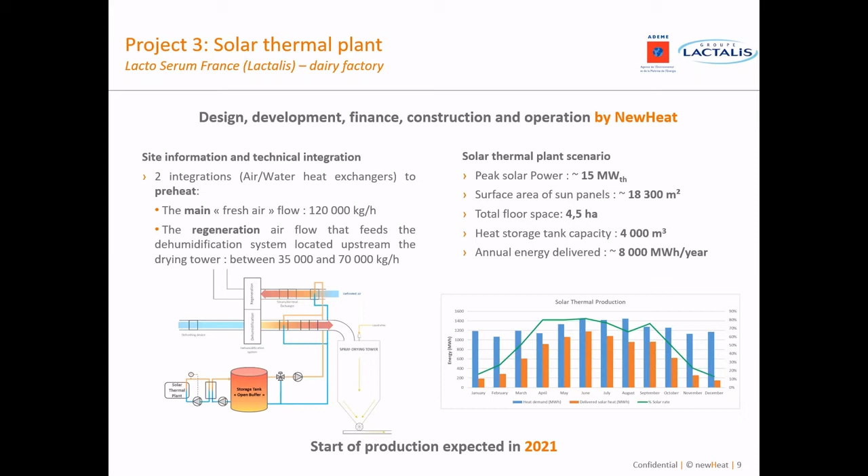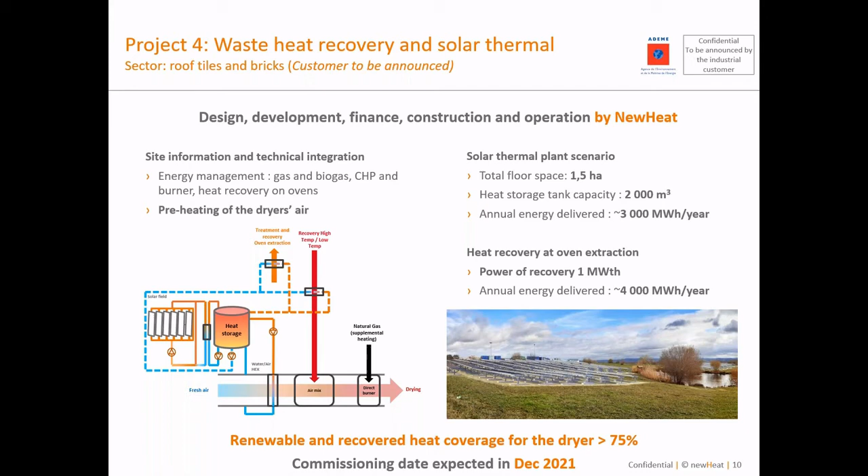The last one is more specific, because it's not just solar thermal collectors to address the heat, but also heat recovery. It's the first plant like this for NewHeat, combining solar heat and heat recovery, so it will be a huge challenge for us to pilot this plant. The renewable and recovered heat coverage for the dryer should be higher than 75%, so we will address most of the heat required by the plant. The commissioning date should be at the end of 2021.

Now that I have presented NewHeat and some of our projects coming and already operating, I would like to present the Remine water project. It is an R&D project in which NewHeat is taking part, about solar powered water reuse and resource recovery in the mining industry. With this link, you can check more information if you're interested. Some basic information: the funding is the European Union's funding instrument, the LIFE program.

The budget is around 1,800,000 euros, and the duration is two years from October 2019, so this project will end at the end of this year. There are four partners for this project, two from Spain: Cetaqua Water Technology Center, and Matsa, which is the mining company the project is being built for.

And also there is an institute from Poland of non-ferrous metals, and finally NewHeat is participating in this project. So to present this project in more detail, there are two main objectives. The first one is to develop, study and validate a zero liquid discharge treatment train for mining industries. It is in this train that the solar thermal collectors will be used, in association with a low temperature evaporation technology that is a brick of the treatment train.

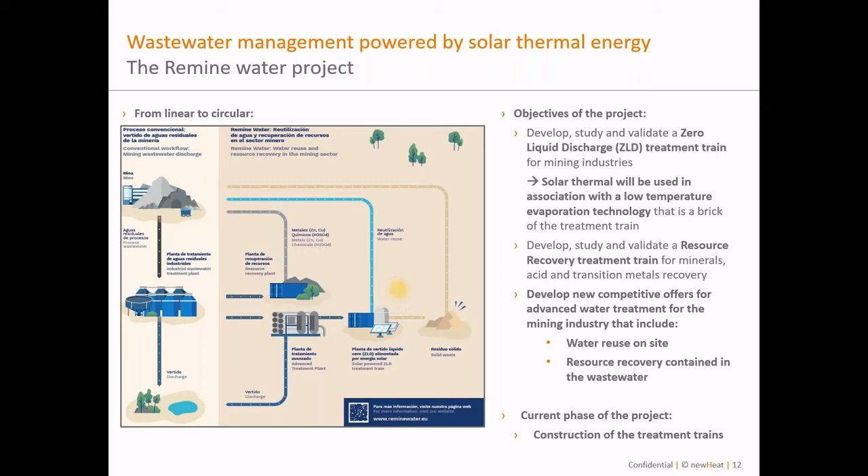Very impressive installations. Well, now we come to the Q&A session, and we can start straight away with the interesting questions that we have received during the webinar. Hello, everybody. We have had some questions for Christoph, and they refer mostly to the market maturity of the technologies he was mentioning. Christoph, maybe you can give us some insights into, for example, SolarDew. Have they really installed plants, and how big are they?

Yeah, thank you very much, Beryl, and also welcome from my side to all participants. Thank you for the question. SolarDew is a startup company. Of course, they have no large installations yet, but some smaller installations, and they are continuously developing their product. I think this is a very promising product. They're developing different components of the product together with research institutions, but it is a product. You can buy it. It's available, and it can be used.